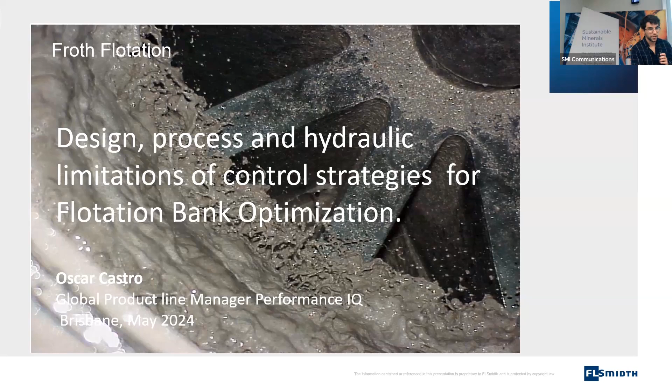Thank you very much. I'm very honored to be invited to give and share some of my experience in process control and process control applied to flotation. I learned process control, and I got interested in process control since I met Bill Whiten back in the 90s. And then I was trained by Guillermo Gonzalez and applying some of their process control strategies and procedures for nonlinear processes at Mount Isa mines.

One of the basics of process control is to define a strategy, and that strategy should consider the first stage in which you have to stabilize the process. Most of the actual engineers that are involved in process control, they are not specialists on mineral processing, and on top of that, they are not experts on fluid dynamics, physics, chemistry and so on.

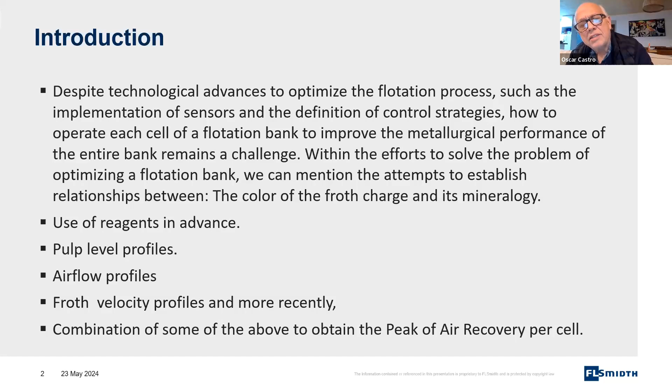And some of them have also more recently defined froth superficial velocity profiles, and some of them a combination of what is being defined more recently as important, like the definition of peak air recovery per cell. So even though it's very important to define the strategy, whatever suits you best in the plant, there is no agreement between the metallurgists or between the process controllers on which of those are the best for the plant and which one will increase the profit of the project.

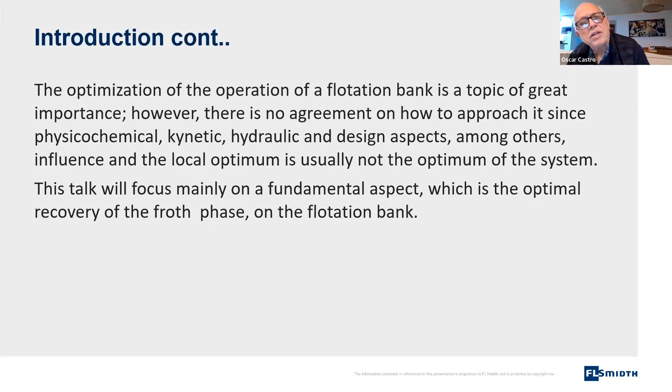So some of the aspects we are going to pay attention to here are basically a couple of mechanistic models, in which you have a collection zone in the bottom of the cell in which particles get in touch with bubbles, and those bubbles rise to the surface and get into the froth zone.

On top of that, since you are raising these bubbles with particles in them, you will drag some of the non-valuable material with them. So the froth will contain the particles that were purely collected in the collection zone, plus the ones that you have dragged through the pulp that are not valuable particles.

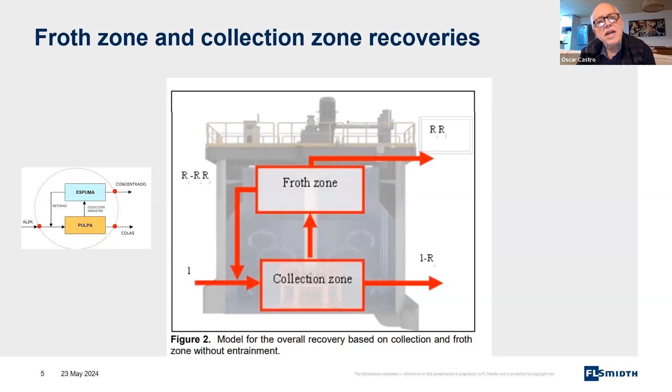And then, as soon as you establish the froth, you have to take the froth out of the cell. So the total recovery of the flotation cell will be the multiplication of the recovery at the collection zone multiplied by the recovery at the froth zone.

So to put it in black and white, if the recovery of froth is zero, the whole recovery will be zero as well. So if you see in any plant a flotation cell that is not overflowing froth into the launders, at that moment you have zero recovery. And if that cell doesn't recover at all, the residence time in the bank will be reduced, and the flotation recovery of the whole bank will reduce.

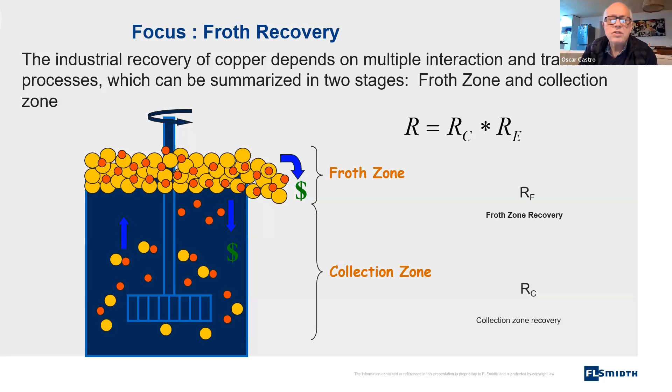So the froth recovery and the residence time of the froth in the cell will affect and will be related to the recovery and the rate of the bank. If the froth residence time is too short, all the difficult particles to be floated are not going to be floated. And some of the coarser particles will also have a very low rate of recovery.

So if you go to the other extreme, instead of having very short residence time for the froth, you will increase the viscosity of the froth, reduce the mobility of the froth, and you will have a lot of bubble bursting. Then all the particles that are dragged by that bubble will burst, and you will lose the particles associated with that bubble.

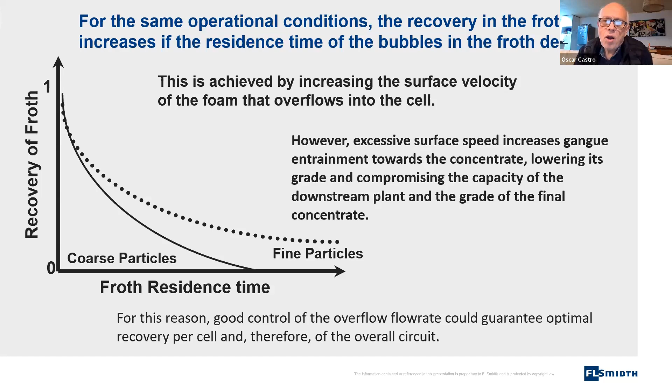And this is some of the aspects in which the peak of air recovery is a way to understand, a way to balance how much is the appropriate residence time for that, and how much is the overflow for that.

So typical limitations that you will have to face within the flotation bank are physical and chemical limitations. Let me give you an example. Physical limitations are related to the configuration of the circuit, the size of the flotation cell, the distance between the launders, and the position of the froth in the cell, especially on those large, big flotation cells.

Chemical limitations are associated with pH control, frother dosages, and collector dosages. Also, as you go from the first to the last flotation cells in the bank, those chemicals are being reduced because most of the chemical will be associated with the froth that you are taking away.

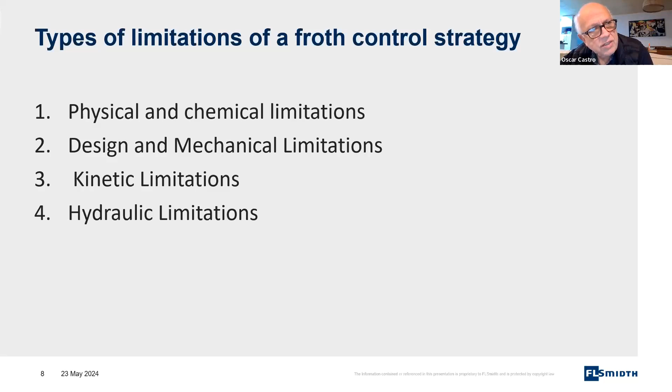So then you have how the surface tension or the froth concentration will affect the bubble lifetime. If you have low concentration of frother, the stability of the froth will reduce, the size of the froth will reduce, and the residence time, or bubble lifetime before the bubble bursts, will be reduced.

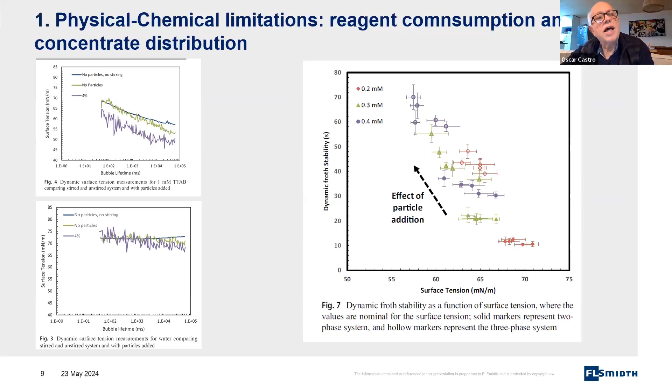And these graphs tend to show you how this is important in terms of surface tension, in terms of the lifetime of the froth, of the bubble, in the cell.

So I will show you a video in which you will have to pay attention to the shape and the bubble bursting from the first cells to the last cells.

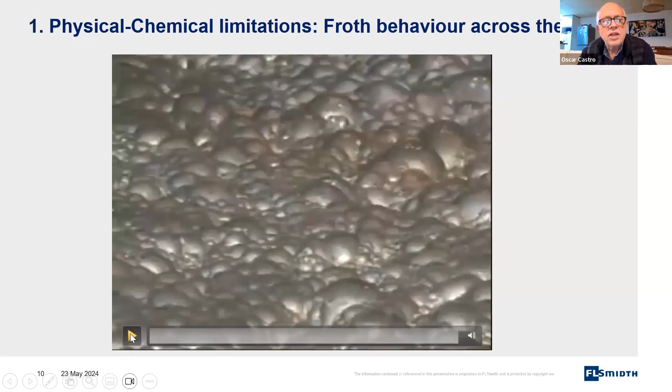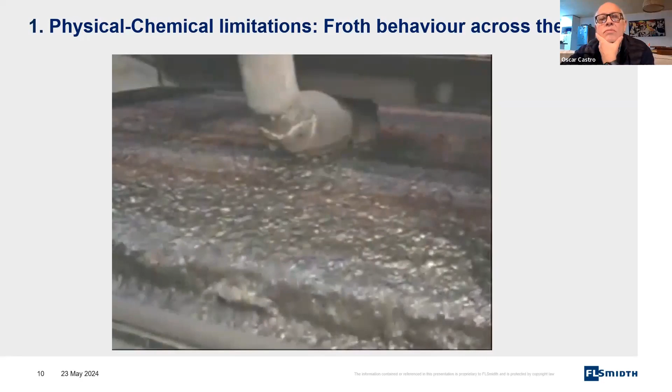The froth in the first few cells of a bank is often heavily loaded with hydrophobic particles. The froth appears dense and heavy. The bubble size is small due to the stability imparted by the particles. As you move down the bank, the appearance of the froth will change. There are not as many hydrophobic particles available to float, and thus the froth loading is lower. Windows appear and froth stability decreases, resulting in larger bubbles, many of which will burst.

So this is one of the key aspects of what we are talking about. You can see in the last cells here, those black zones are what the professor calls windows. That area is not covered by concentrate.

And the slurry is also an agent - it's a stabilizing agent. So if the bubble is covered by concentrate, the bubble and the froth will be more stable.

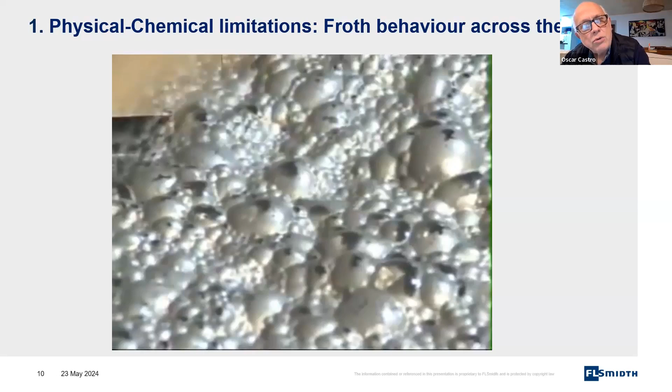So you can see in those last parts of the video that those froth bubbles which have windows are the ones that are going to burst first. This is because the concentrate has also been evacuated - most of the concentrate has been recovered in the first cells.

So if I have a strategy which focuses on recovering all the concentrate in the first 3 cells, the froth in the last cells is going to be very unstable. And regardless of the set point of froth level that you establish, physically, you are not going to be able to reach it.

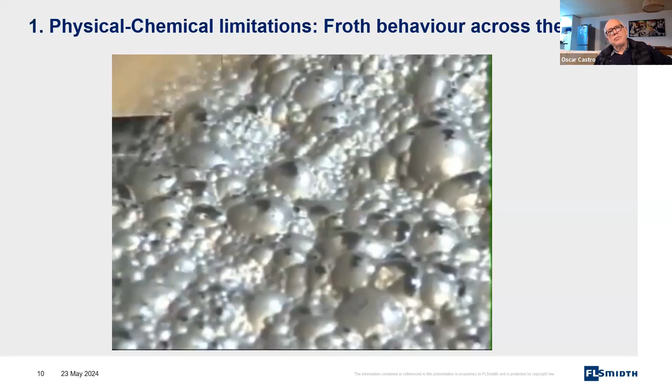So the strategy will fail because you will have a very unstable froth. As soon as you start not achieving enough froth height, the dart valves will start trying to close too much. And then the dart valves are going to go beyond the limit, where you may have cavitation of the valves.

So one of the aspects I want to emphasize here is that the froth layer, or froth height, is a consequence of how many bubbles you are generating and how many bubbles are bursting in the first place.

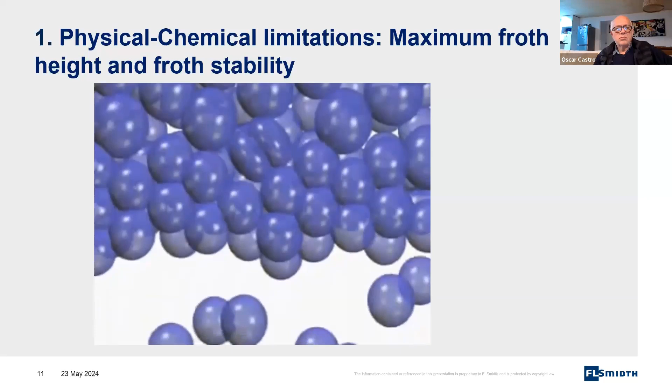The bubbles at the base of the froth are similar in size to those rising in the pulp. As the bubbles move up through the froth, some coalescence occurs and the bubbles become larger. As bubbles arrive, each layer is progressively pushed upwards, the froth builds, and the height increases. Eventually, the rate of new bubbles arriving at the base of the froth will equal the rate of bursting, and the froth height will stabilize.

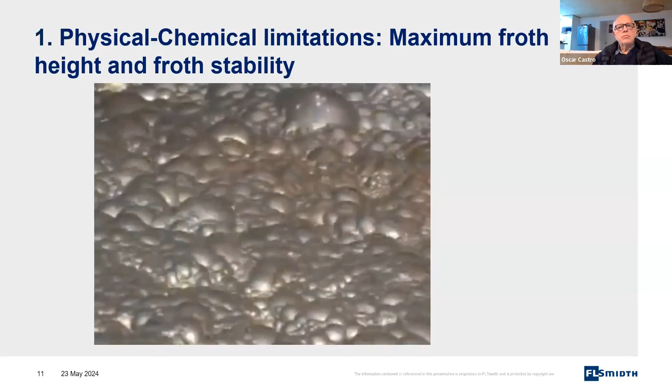In practice, the froth height, also known as level, is controlled by removal of froth into launders and by moving the position of the froth-pulp interface.

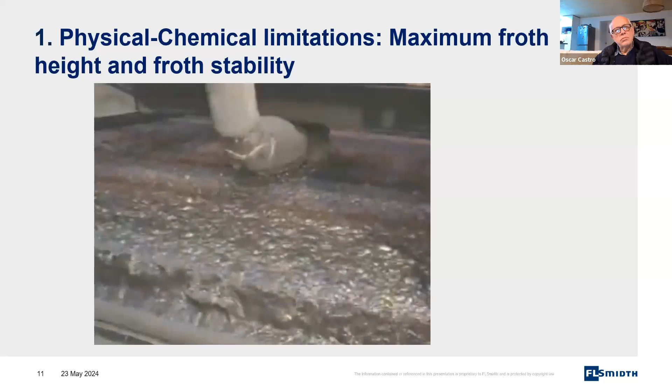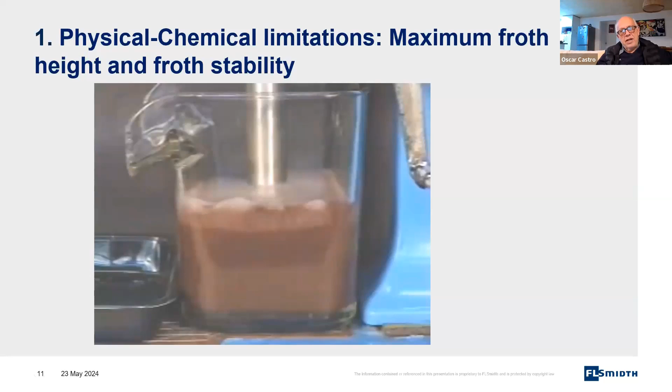So you saw here hydrophobic particles. You saw in this photo that if the froth is not overflowing into the launder or into the tray, there is a maximum physical froth height that you can achieve in any flotation process. That means there is a physical limitation.

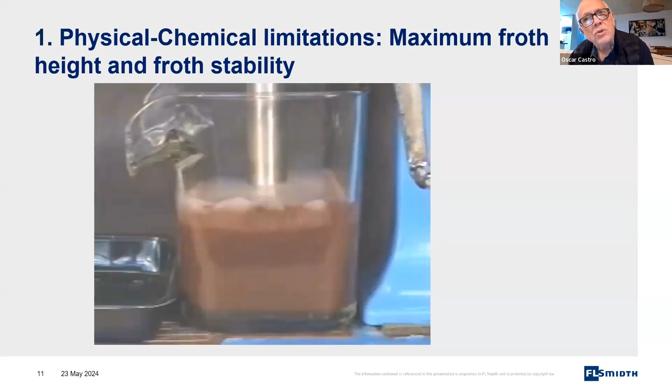So if you set a froth level limit that goes beyond these physical limits, you're not going to be able to achieve it. So if your strategy does not consider this aspect, you will fail, because the system will try to achieve something that is physically impossible.

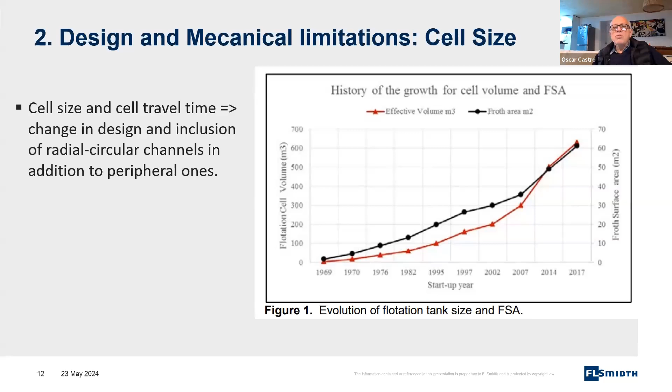The limitations associated with mechanical limitations are basically how much is the distance between any position in the froth towards the peripheral launders. Particles of the froth close to the peripheral launder only have to travel 20 or 30 centimeters. But in a large cell, like the ones we are designing these days, which are in the range of 650 cubic meters, sometimes they have to travel more than 2 or 3 meters to reach the outer launder. So that froth becomes more unstable because it's bursting, and the residence time of that part of the froth far from the peripheral launder will be quite different from the one closer to it. That's the reason why we invented the radial launders.

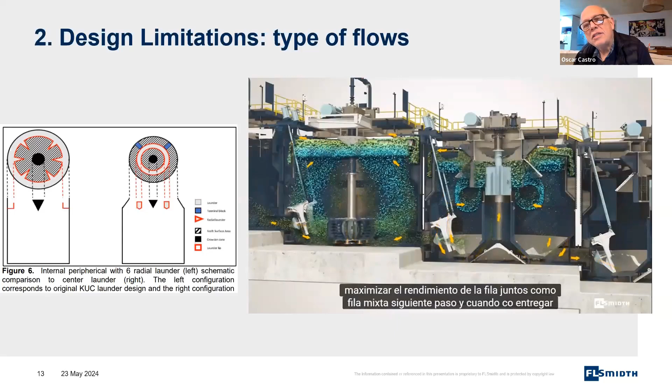So where you put the peripheral launders is very important as well. That's the reason a cell that is auto-aspirated needs a different type of launders than one that uses forced air, because they have flow patterns that are reversed.

Design limitations are associated with the need for radial launders, and how do you calculate them? Some of the methods we use are very empirical, such as froth carrying capacity and lip load. Normally you calculate how much concentrate you're going to recover, or the mass recovery of concentrate in your flotation application. Then you see there are some patterns, some good practices, where you use those two parameters, and if they fall into the benchmark, they will tell you how many launders you need for that application. But it's not a physical-chemical calculation from basics.

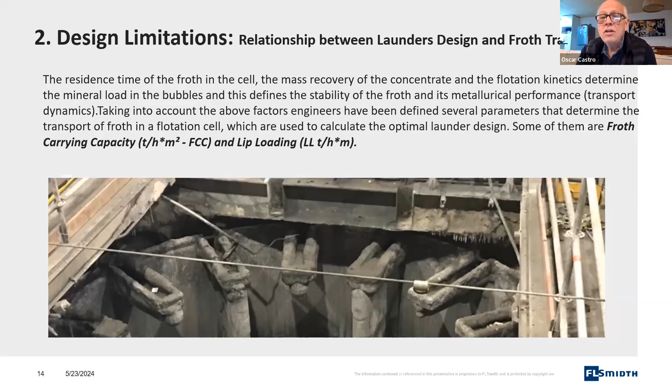So those are the typical values we use for froth carrying capacity: for rougher it's 0.8 to 1.5, for scavenger it's 0.3 to 0.8, and for cleaner it's 0.10 to 2. For lip loading, it's less than 1.5 tons per hour per meter. These are the typical values that everyone has established. What is the physical meaning of those numbers? They happen to be the ones that most companies or designers use because it's good practice, but there is no physical calculation explaining why those numbers are meaningful or what they mean.

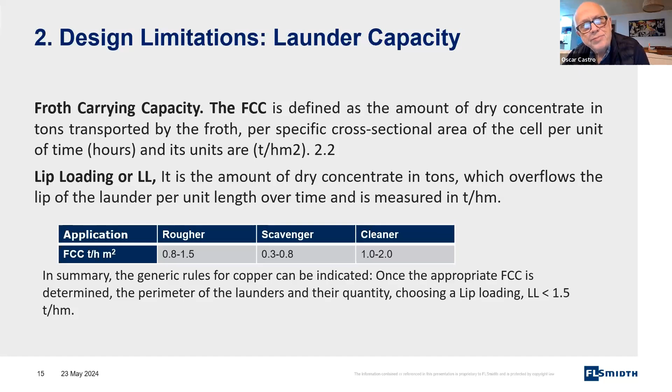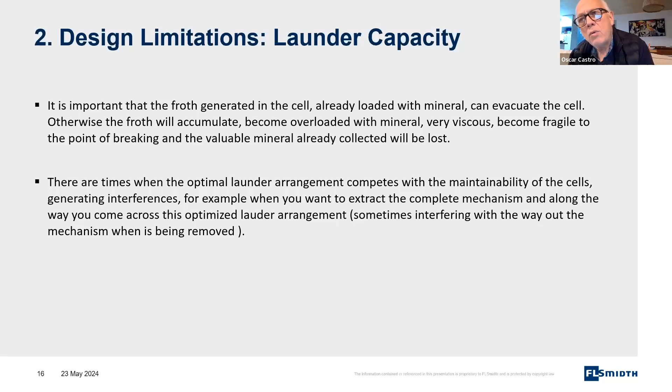So launder capacity is an important aspect because it will tell you, it will impact the residence time of the froth in the cell.

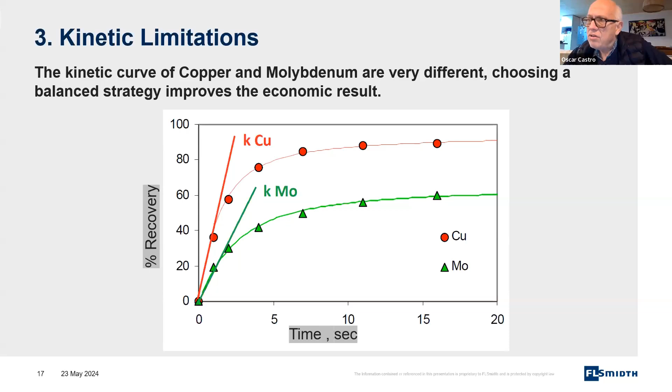So kinetic limitations: if we decide to have a strategy oriented to recover copper, probably copper, because it has a faster kinetic than molybdenum, you will obviously lose a lot of molybdenum in this flotation cell. So you have to have an appropriate strategy for all the valuable components of your flotation process.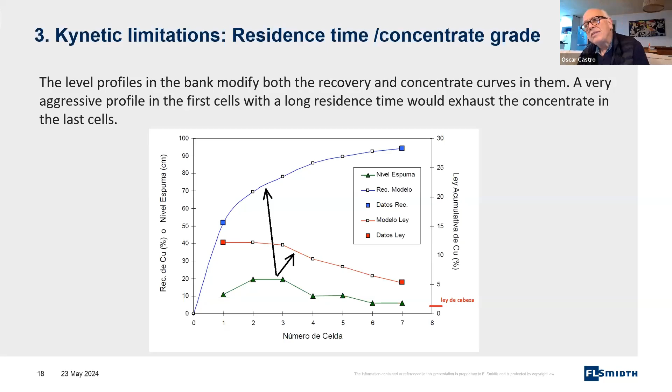On top of that, the number of cells and the residence time you allow by defining different froth levels will change the actual volume in the cells. Let's put it in an example: if you have a very large froth level, you will reduce the total volume of the bank. In the opposite case, if you have very narrow froth layers, you will increase the residence time for flotation, and some of the last cells will recover a lot, but the grade will suffer, because grade and recovery in a flotation bank are linked. So if you increase the recovery, you will decrease the grade, and vice versa.

The layout of the cells is very important, and how much distance there is between the first cells - what we call the hydraulic jump. From the first cell coming into the second one, you do have a hydraulic jump. So you have this level, and then the second one is beneath that one. But the second and the third are at the same level. So are you going to be able to have exactly the same froth level in this one and this one? How are you going to control that?

Most of the time, if you don't pay attention, some of these cells are not going to overcome it. The froth is not going to overflow into the launders in the same way. Sometimes this one is not going to float at all. So paying attention to the profile and the inclination, and how your circuit is established by the engineering company, will restrict the way you have to operate the flotation bank.

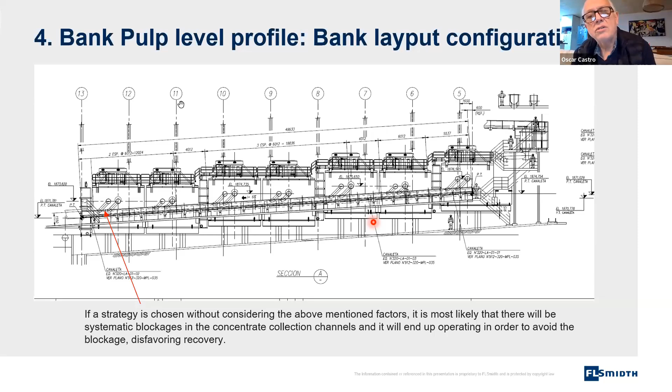But establishing a hydraulic jump between cells for large banks is more costly, because you have to have more costly installations.

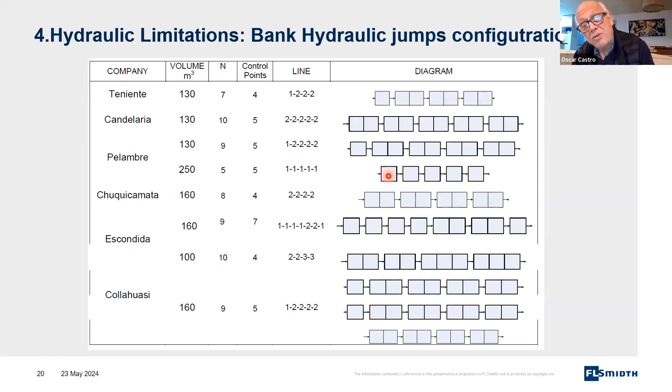Considering that any plant, or most plants, have different profiles, can you apply the same strategy for all of them? That's the question. And this is why you cannot have the same height in those cells that are on the same floor.

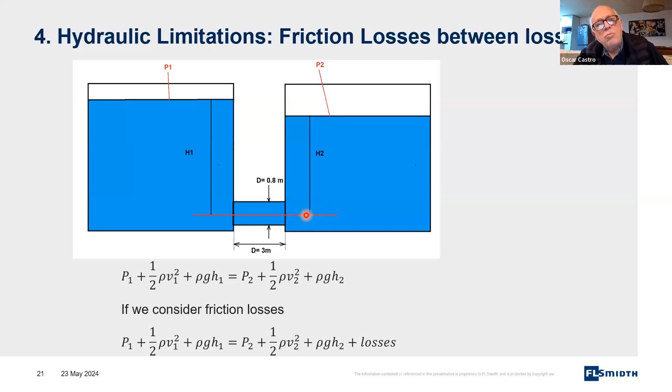The distance between this and that establishes the potential energy from the fluid, which will be the driving force, according to this theoretical energy balance equation, to overcome the resistance, the friction losses, and the restriction losses that you will face between one cell and the other. If this difference in height is not enough to account for the friction losses, you will not have movement from this point to that one - there will not be enough pressure drop or pressure difference to overcome the friction losses.

Another aspect to consider is the friction losses at the dart valve, and how you operate the dart valves. The flow coefficient tells you how much friction loss you will have and how much flow you're going to have as you close the valve. This also has to be considered in order to stay in the feasible region, so as to overcome the friction losses you will have there.

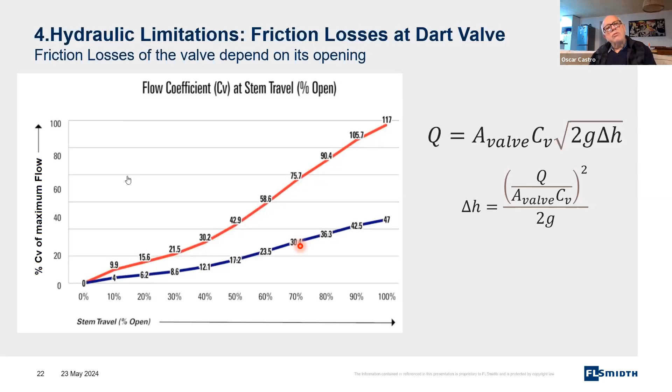Also, you cannot close the valve to a point where you reduce the velocity between cell 1 and cell 2 below the critical settling velocity in the connection boxes. On top of that, this area is not completely linear. So you have to operate these dart valves within a window, which is a physical window.

Typically, if you read the manuals, they tell you to operate between 20 to 80% of the stroke. But sometimes you will have to define particle settling limitations, or what the velocity or speed of the slurry between the two cells will be, so you don't go below the settling velocity and end up with sanding problems.

Or even worse, if you close too much - especially the last dart valves - in order to achieve the physical froth level you wanted, you can have cavitation. Most engineers are not aware that you can have cavitation in a valve.

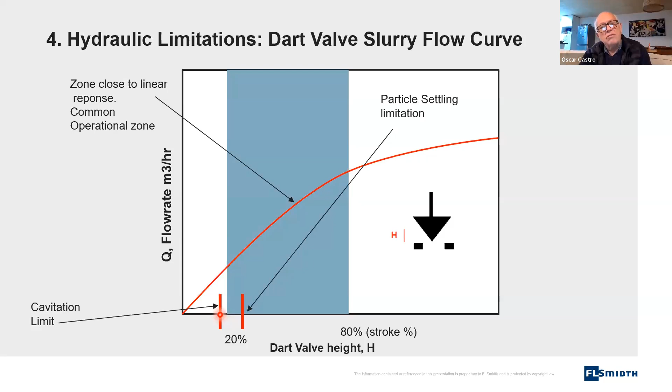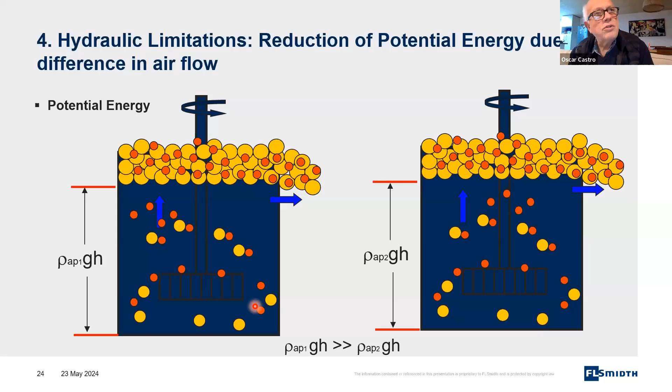So the potential energy between two continuous cells is quite important, and the definition of potential energy is also affected by the air holdup. Even if you have a difference in froth levels from one cell to the other, if you put too much air in the first cell, you will not have enough energy to overcome the frictional losses.

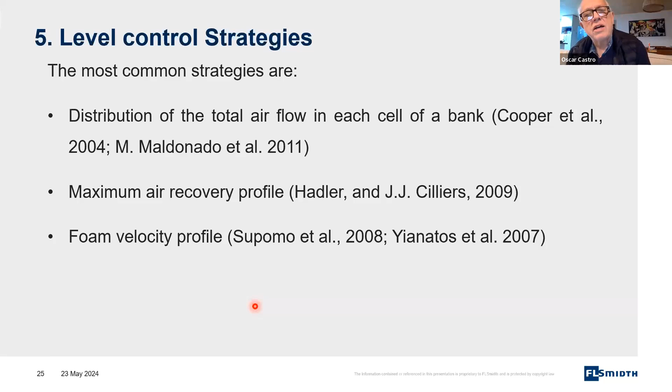So you will see a lot of strategies and papers around the world discussing the importance of establishing froth levels, and they propose different methods for optimizing process control.

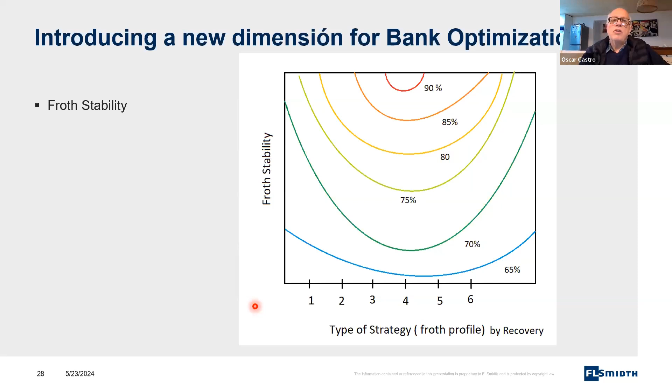Some of them are the airflow profile, some of them are the pulp profiles, but some of the ones that I like more is the froth stability issue. So froth stability tells you that you have to somehow take your concentrate out of the cells, out of the banks, in a very proportional way. Do not take all the concentrate in the first two cells, because you are not going to have enough concentrate in order to cover the froth in the last cells, and you're not going to achieve... you will have too much bubble bursting, and then you will not be able to reach the froth level that you are going to have. Some of the strategies that are most likely in that path are the ones calling the profile of maximum air recovery.

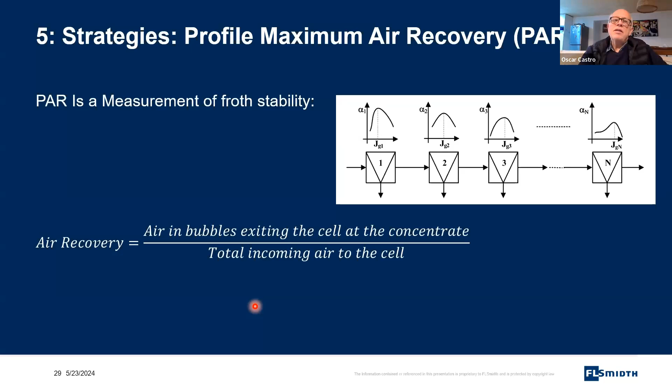So the maximum recovery per flow of air in the cell tells you if you inject X amount of volume of air into the cell, how much of that air will end up in the concentrate. So if you calculate the concentrate that goes into the launder out of the cell, you will be able to measure how much bubbles are bursting, and that is going to be a measurement of froth stability. So this is a method that gives you an indirect measurement of froth stability.

So there are multiple control strategies for flotation cells. Many of them are generating significant improvements in both recoveries and grade. But if you do not pay attention to those limitations that I have mentioned during this presentation, you are not going to be able to reach or achieve what you have theoretically defined as the best strategy. So this is an invitation to the physicists, metallurgists, and mineral processing guys to get involved in those mechanisms that define those limitations, in order to cooperate with the process control guys and process control metallurgists to together define the best process control strategy.

Okay, that's about it. I don't have too much time, so it's 45 minutes. I tried to put all this concept into just 45 minutes. Thank you. Right, if there are any questions.

Thank you very much, Oscar. It's a very nice presentation. Even for me, I'm a geologist, to know a little bit more about flotation, its limitations, and how to mitigate some strategies. So I'm going to open for some questions from the audience.